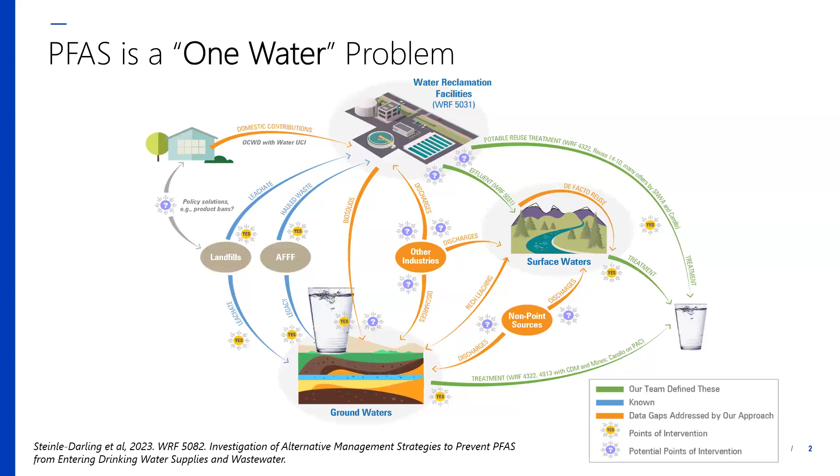Last week, EPA announced the revision to the National Primary Drinking Water Rule for PFAS. One thing I want to highlight is even though fewer PFAS are proposed to be regulated, EPA is reconsidering the MCLs and hazard index approach for PFBS, PFHxS, GenX, and PFNA. But the treatment focus is probably going to be unchanged because in New York State, PFOA is the driving PFAS in terms of treatment technology selection and performance.

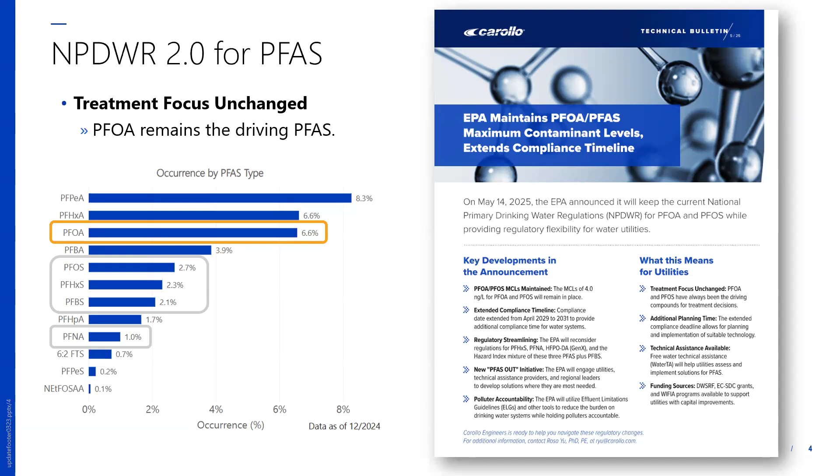New York State Department of Environmental Conservation, DEC, has released draft guidance for PFAS discharges of PFOA and PFOS. That guidance level, even though it's not regulating PFAS in surface water discharges, does provide the state with some health information on PFOA and PFOS.

The state may take additional actions or efforts to regulate PFOA and PFOS if deemed necessary to protect surface water sources. The human health guidance level for PFOA was 6.7 nanograms per liter, whereas PFOS is 2.7 nanograms per liter. Those are relatively low guidance levels when it comes to health impacts, and especially for PFOS, it's even lower than the drinking water MCL for PFOS.

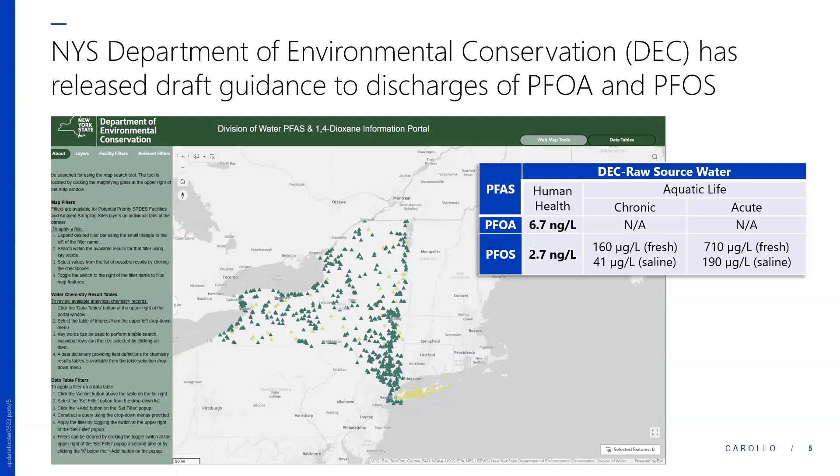When it comes to PFAS treatment, you've probably all heard of the best treatment technologies, including GAC, ion exchange, novel adsorbents, or high pressure membranes like nanofiltration or reverse osmosis, or more novel processes like foam fractionation. The nature of all those treatment processes is they don't destroy PFAS, they only concentrate PFAS.

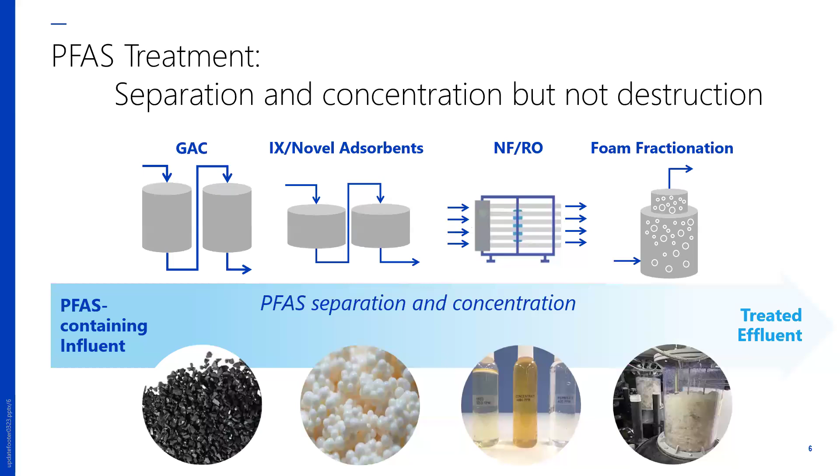It's either using the process as a standalone, such as GAC or ion exchange, or a combination, such as nanofiltration or reverse osmosis combined with foam fractionation. You will end up with a residual stream that's more concentrated in PFAS that needs to be taken care of or properly disposed of.

Increasing limitations on water and wastewater treatment residual disposal require PFAS destruction. We know, for instance, with GAC, ion exchange treatment, or novel adsorbent treatment, PFAS get concentrated on the solid media, so you generate spent media as your treatment residual. GAC can be reactivated and potentially reused, whereas ion exchange or novel adsorbents are typically sent for incineration to end the PFAS cycling.

For liquid concentrates like RO concentrate, nanofiltration concentrate, or foamate from foam fractionation residual, if the community is on the coastal lines, ocean discharge can be an option. But here in New York State, that's typically not an option. Deep well injection, sanitary sewer disposal, and surface water discharge are typical liquid concentrate disposal approaches.

But the looming issue is, if the utilities or owners cannot easily discharge the RO concentrate or the foam, then how do we address PFAS?

In terms of wastewater treatment residuals, biosolids, everybody knows there's a lot of attention around the health impact and risk assessment when it comes to PFAS in biosolids. Typically, biosolids can be land applied and reclaimed. Surface disposal, incineration, and landfilling are also alternative approaches.

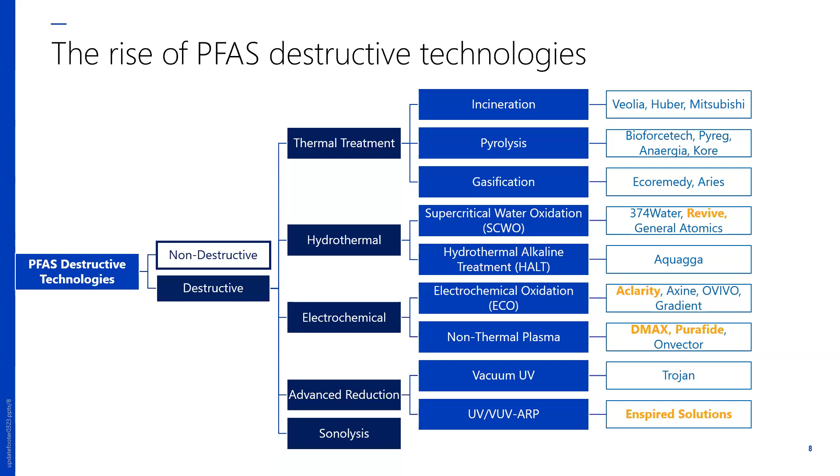So why is PFAS destruction a challenge? Because the carbon-fluorine bond is one of the most energy intensive bonds when it comes to organic chemistry. To break the carbon-fluorine bond, it takes about 485 kilojoules per mole of energy. That's the reason why it's very energy intensive.

As a reference, typical hydroxyl radical, which we consider as advanced oxidation processes, provides 270 kilojoules per mole. That's still not enough energy to break the carbon-fluorine bond. Sulfate radical, which can be generated using a UV-based or plasma-based process - those energies are still not sufficient to break the carbon-fluorine bond. That's the reason why PFAS destruction is energy intensive and can be challenging.

So most destructive technologies therefore require intense energy. There are innovations and breakthroughs when it comes to technology development to lower the energy cost for PFAS destruction, which we will hear about, and also long reaction time, because you need to supply sufficient energy for the carbon-fluorine bond to break.

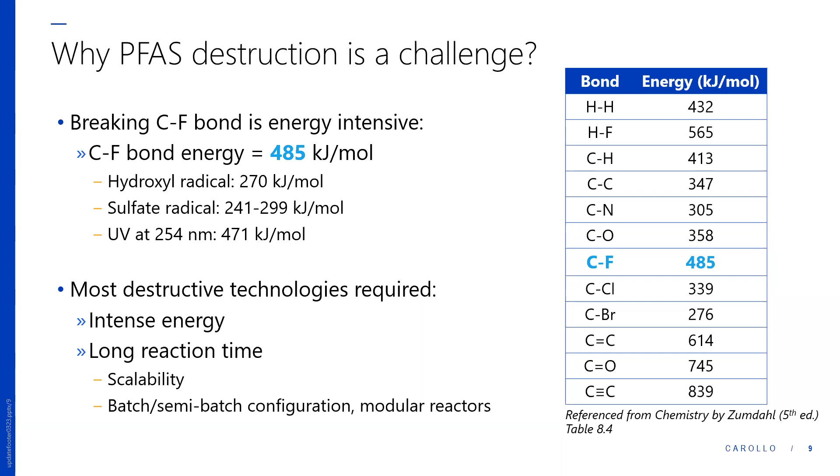So why does reaction time matter? Because it relates to scalability from an engineering perspective, and it also determines the configuration. If a long reaction time or exposure time is required, then we are discussing the differences between batch treatment, semi-batch treatment, or continuous flow treatment.

So when it comes to destructive technology evaluation, hopefully these are the four matrices or four sections of criteria that we consider. First, starting with matrix - what does each technology treat? It can go from liquid concentrate to solid concentrate.

From landfill leachate, industrial effluent, AFFF, or concentrate, foamate, to more solid waste such as sewage sludge or spent adsorbents.

As I mentioned earlier, scalability is definitely a consideration, especially for large scale applications. Hopefully we will learn from all the technology providers in terms of their current capacity and their integration with additional concentration processes such as RO or foam fractionation or novel adsorbents, to increase the PFAS concentration in the waste stream.

Flow capacity, as I mentioned earlier, is it batch treatment, semi-batch treatment, or continuous flow treatment? Modularity - as I mentioned, reaction time is a critical consideration when it comes to PFAS destruction. Can you increase the system capacity or throughput by providing multiple modular systems and system configurations?

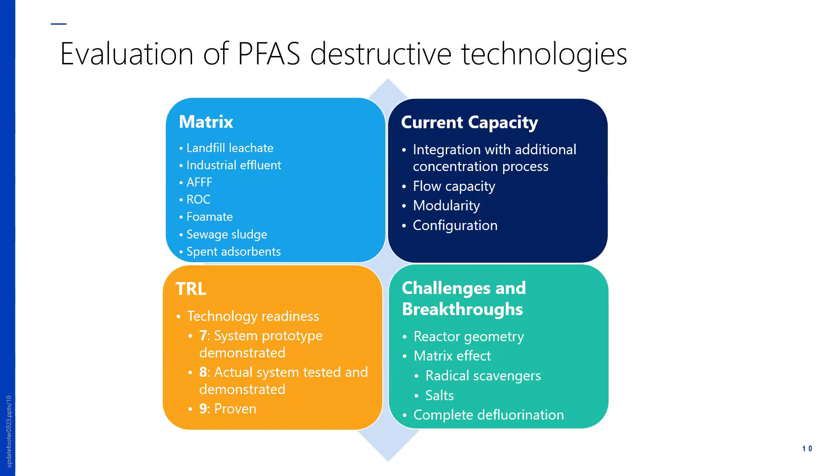In this presentation, I think I'll answer some of the questions that Rosa raised in her four-quadrant diagram that was just shown there.

Just a quick one-slide overview of Aclarity. We were formed out of UMass Amherst back in 2017. We're a small team, 15 or so of us, based in Southeast Massachusetts, and have really been 95% focused on PFAS remediation since about 2020. The company was originally formed to deal with various kinds of recalcitrant COD, tough-to-break-down organics in wastewater.

So TRL level, we see ourselves at TRL level 8 or 9. We've put multiple pilot versions of our full-scale technology out into the field, and we'll show you a full-scale system we've developed and deployed this past year. Basically, we're a startup running off seed money and Series A money to pay the bills and help us develop into a solution provider in this industry space.

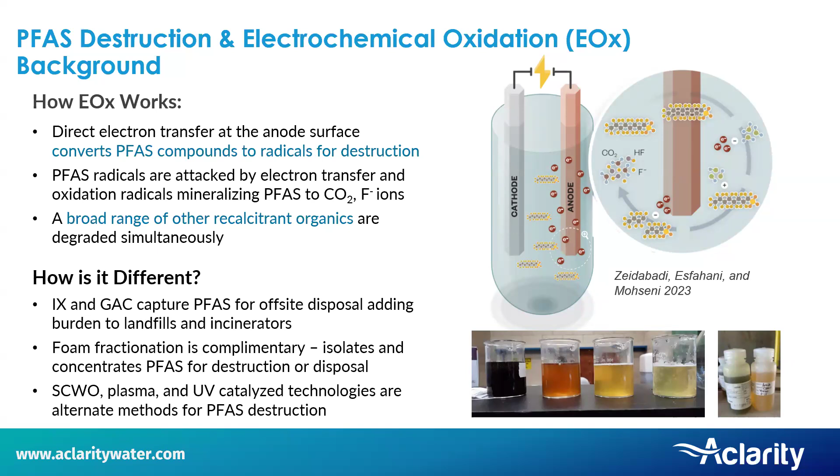That system, if we're doing a low concentration stream, we can do about 30,000 gallons a day. For very concentrated streams that we want to run in batch mode, we can run maybe 8 or 12 hours on 250 gallons at maybe 5 million or 10 million nanograms of total PFAS.

It's perfect size for treating, let's say, landfill leachate from a 50,000 gallon a day landfill producing that much leachate, running through foam frac, concentrating the leachate by about 500 or 1,000 times, and we're getting between 50 and 100 gallons total per day of leachate to be treated. We'll run that through our systems very well.

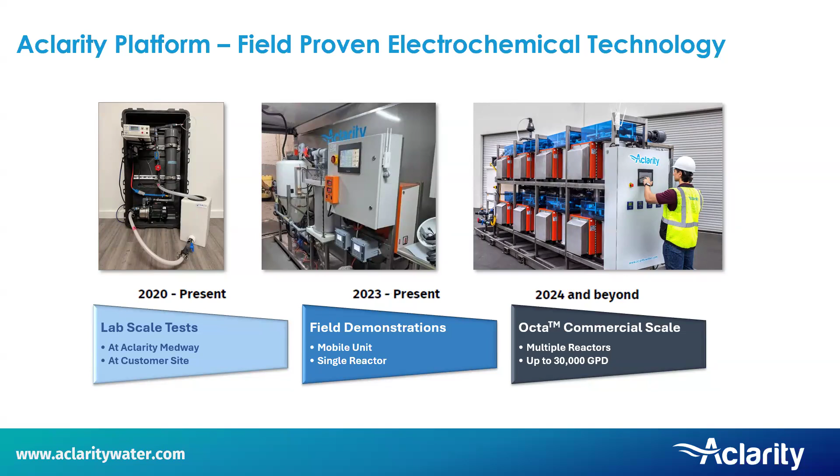Okay, so it wouldn't be right if we didn't show some kind of destruction data. So this is what we call an industrial effluent. It is PFAS that is in chrome plating rinse water. The chrome-based electroplaters or anodizers are using a mist suppressant to keep the hexavalent chrome mist from floating around in their plating operations, floating around the building and causing problems with operators at those sites. This mist suppressant contains, guess what, PFAS.

And it ends up in the rinse water at the end of the process. It ends up in the baths, but the baths don't get replaced really at all. They just make them up with chemical over time if they need to, but that rinse water is a problem. What we can do is go upstream of the general waste leaving a metals finishing facility, go to the part of the facility that's running these mist suppressants and treat that rinse water directly.

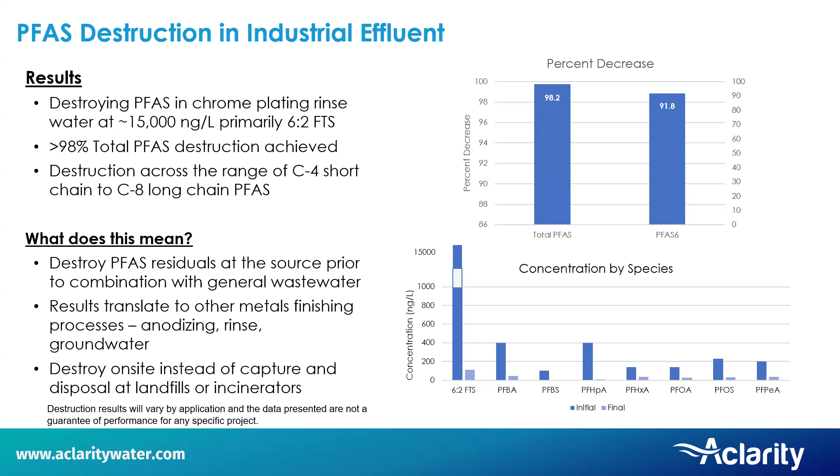So in a case like this, we would run this process probably for a little longer time to get slightly better 6:2 FTS destruction, and then the discharge would probably go through an ion exchange media or a GAC or something afterwards. But this gives you an indication of the types and levels of destruction we're doing.

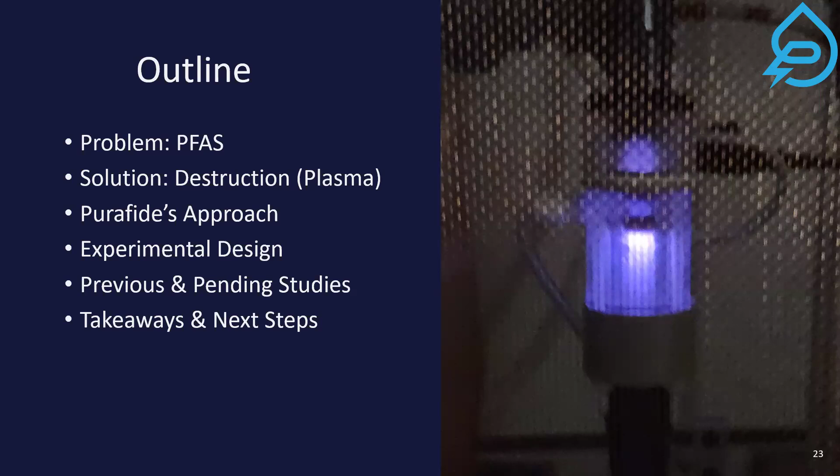Thank you. So since we have another plasma technology here, I'll go a little bit into how plasma works in general, and then we'll talk specifically about what we think makes Purafide special. I'll touch on where we think plasma could fit into existing treatment trains. Everybody knows the problem, so we'll touch on the solution briefly, specifically our approach, and then some of the experiments and data, and then where we think our next work looks to go.

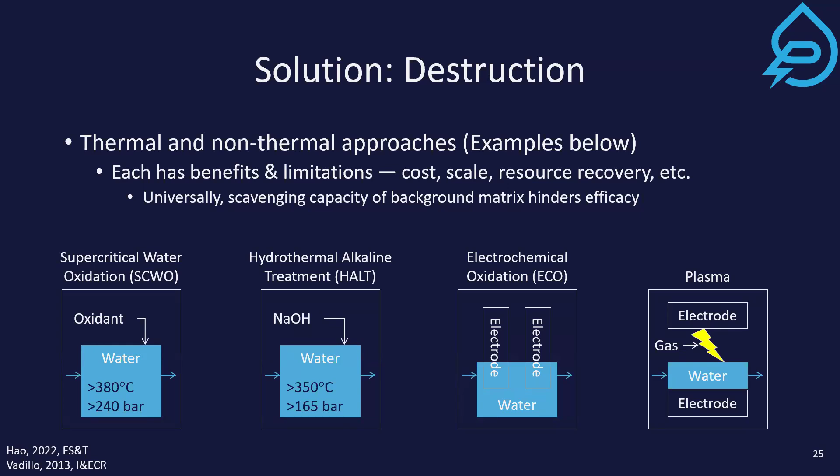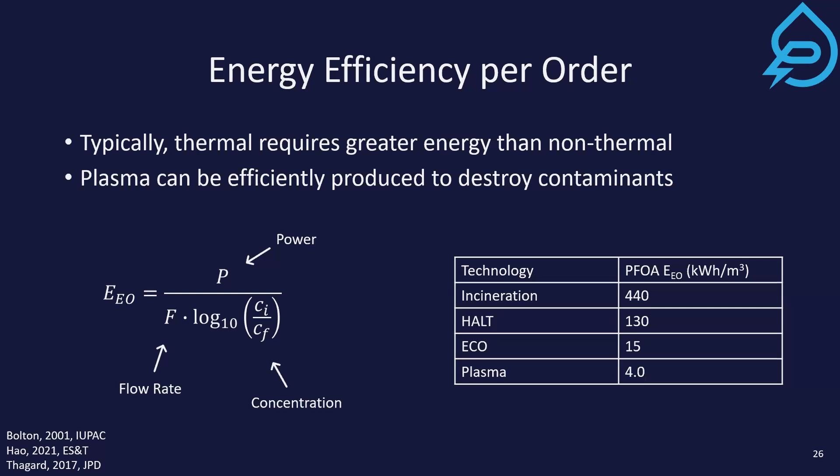So we like to use a metric known as energy efficiency per order, which is a measure of how much energy you need to clean a certain volume of water at 90% removal for a given compound. In this case, I've collected a few data points specifically for PFOA from different treatment technologies. As you can see, incineration is very energy intensive. HALT is less energy but still on the higher side. And then electrochemical oxidation - but the reason we like plasma is that it can be extremely energy efficient.

So what exactly is plasma? A lot of people don't realize that ozone and UV technologies are plasma-based technologies - you are making a radical that ultimately you're using to destroy things. In the case of UV, you're making plasma inside of your bulb, and then shooting it out, and only the UV is escaping. Now there are new technologies like LED, but I won't get into that.

However, ozone and UV do not take advantage of the short-lived radicals. What's nice is that when you make direct contact of plasma with water, you get enhanced reduction and oxidation that takes place. So how exactly does it work?

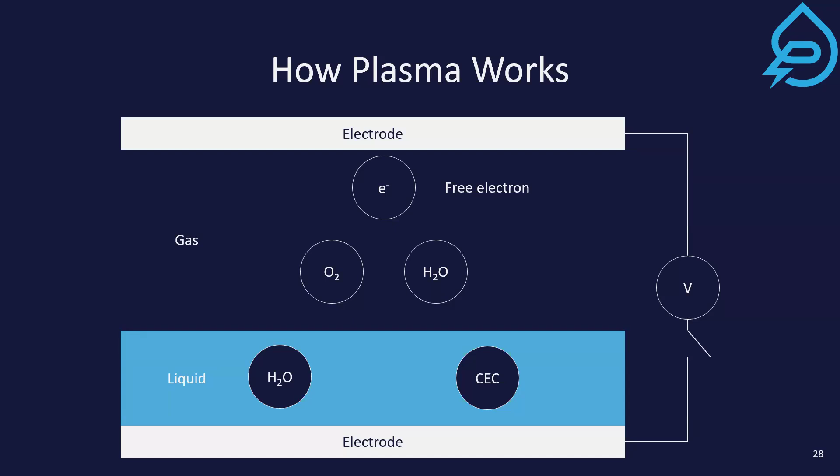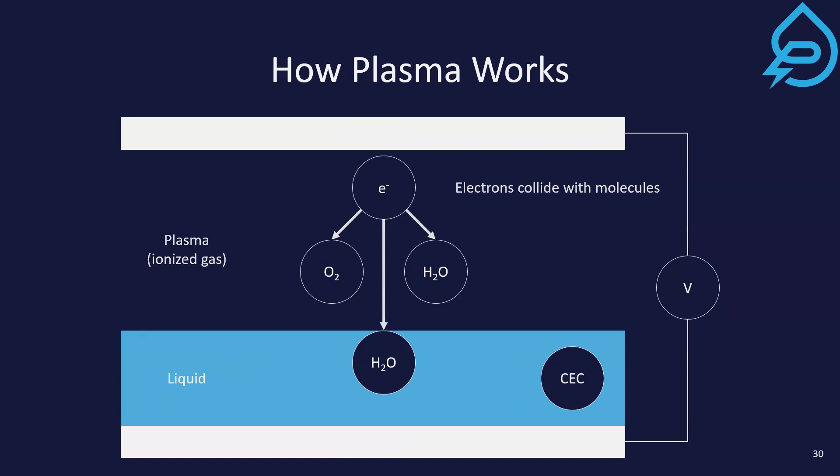I'm just showing you a few molecules here. In the bottom right is your contaminant of emerging concern that sits in some water, and then you have some gas - I'm showing oxygen and water, but you could have nitrogen, argon, all these different things. In air, there's always this free electron hanging out. So when you apply voltage, this electron will accelerate across the gap, and this electric field carries your electron, but hopefully you pump in enough energy into the system that as this electron collides with these molecules, it'll ultimately create radicals. Your oxygen will break up into atomic oxygen, singlet oxygen, superoxide, all these other things. And you also make UV in the process as well.

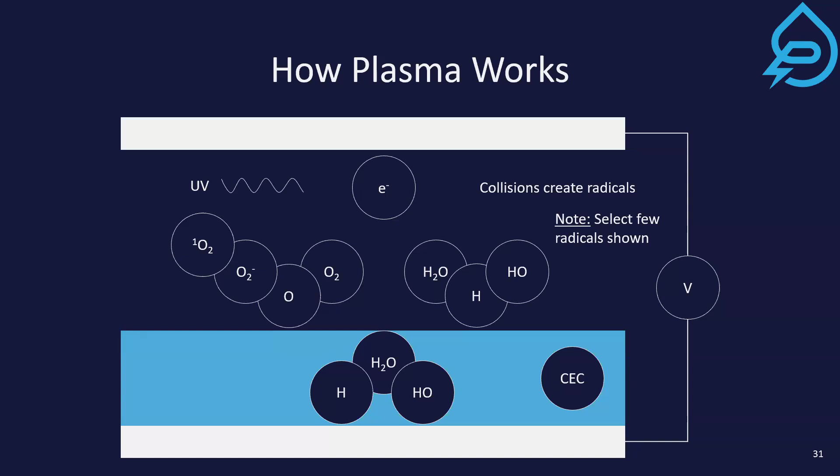So this happens both in the air and in the liquid. As it continues, these radicals will react with one another, and ultimately they will continue to react and diffuse into the water. So the way I like to view this is just a cascade, an avalanche.

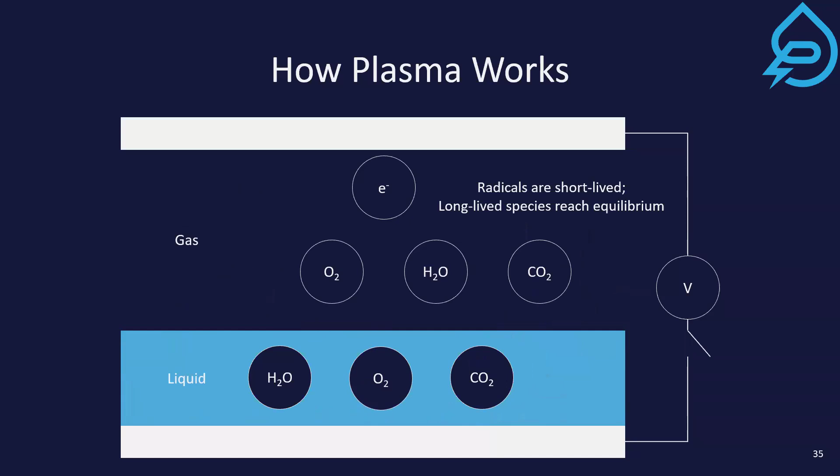As a physicist, I view all chemistry in terms of just electrons. If you can manipulate the electron to give you the energies that you want, you can ultimately induce whatever reaction you want. As these things continue to react and diffuse, they'll cascade and ultimately find your emerging contaminant until, assuming you hit it enough times, it should turn into carbon dioxide and water and any inorganic salts. In the case of PFAS, it should be fluoride. And once you turn off the plasma, you'll just be left with the longer-lived species.

So what makes us special? A lot of people will tell you they think they know what's happening in the water. Most of us don't. We like to treat it like a black box, and we'll destroy things and measure things outside or after treatment and try to induce what's happening here.

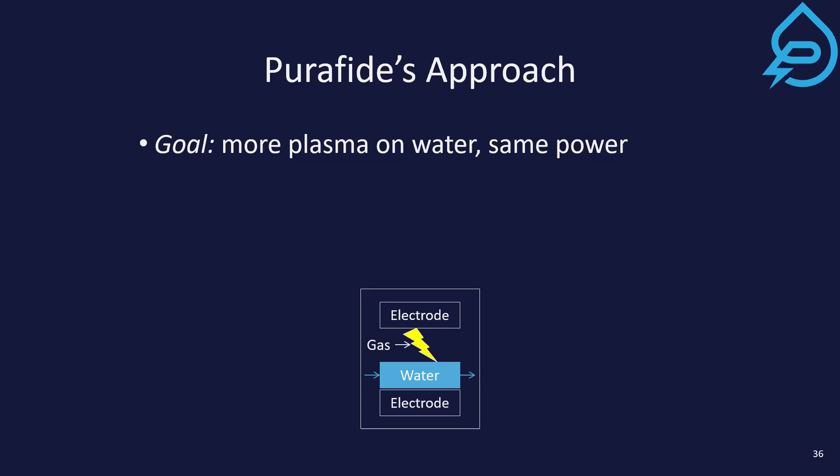But really what happens is that when you see plasma, when you see lightning in air, it's very filamentary, very small, with a very small contact area. So the name of the game is how can I increase this contact area? How do we get more plasma on water using the same amount of power?

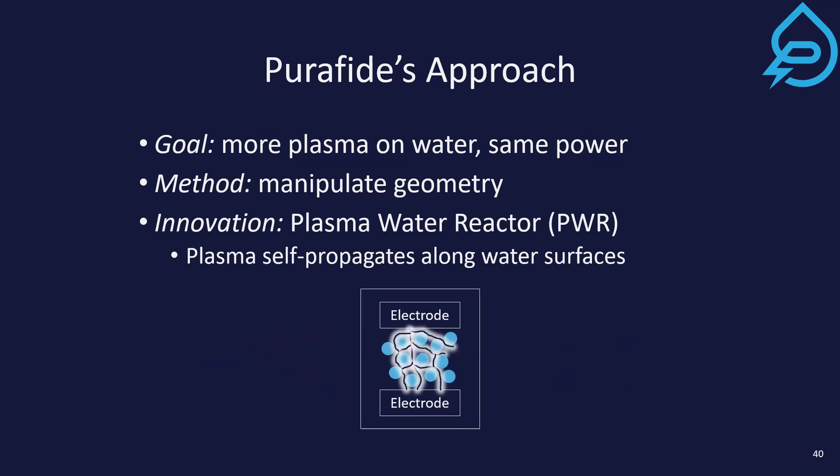In our case, we like to manipulate the geometry. That ultimately gave birth to what we call the plasma water reactor, or PWR, which is an homage to my nuclear engineering background. The name of the game is how do I get the plasma to interact with more water? Here I just have some water droplets, and if these are closely spaced enough, as I pump more and more energy into this thing, the plasma will continue to propagate across all these different surfaces until you finally have something that looks like this.

What we do is, everybody's water is unique. So we have to take your matrix, then modify the operating conditions and vary all of these different flow and geometry settings to ultimately determine how to optimally treat your water.

Everybody will come to you and say, hey, I want this cleaned as quickly as possible, I don't care how much energy it takes. That's one end of the spectrum. Or on the other end, okay, I have this vat of concentrate that doesn't really need to go anywhere, but I ultimately need to get rid of it—use the least amount of money, aka energy, to destroy it. So that's on the other end of the spectrum.

So we like to play around with these operating conditions to kind of map this out and determine what these costs look like. We'll operate first in batch mode, sample at various treatment times, and then monitor the plasma and the water quality in real time. We've developed in-house analytical methods for PFAS and other emerging contaminants.

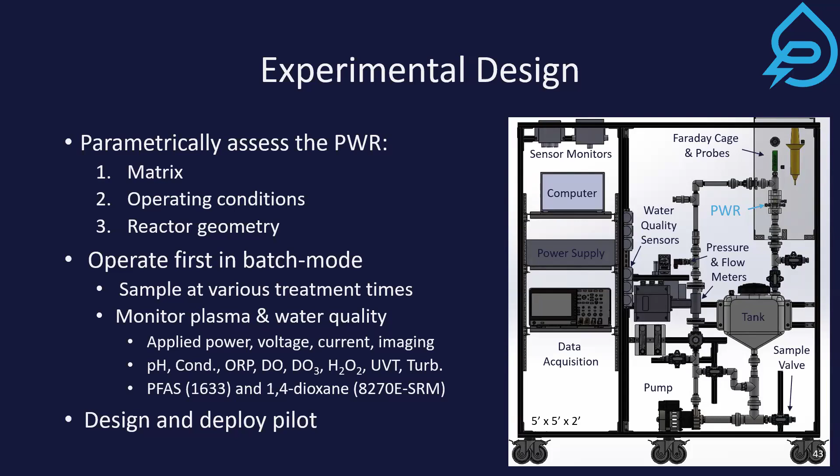We used to do our work mostly on 1,4-dioxane and then transitioned to PFAS. We would ultimately design and deploy the pilot. We're at probably a technology readiness level of 6. We're in the process of deploying our first few pilots, and we've worked with different state agencies, engineering consultancies, and environmental organizations.

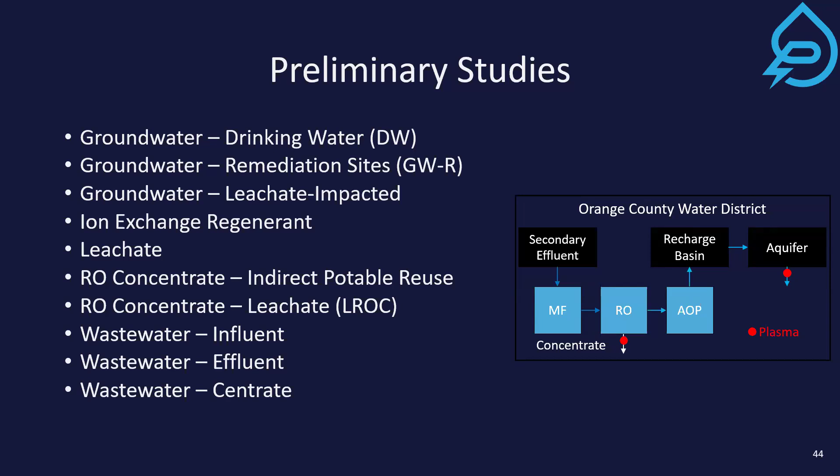We've tried a wide range of matrices—everything from drinking water all the way up to RO concentrate of landfill leachate and everything in between. One of the hardest things for us is actually that the plasma works in all of these matrices, so the hard part is figuring out which one we should target first and deploy our pilots in.

So I have some data here. We don't need to really go into it too much—I'd be happy to discuss this on the side, but this is just to show you some of these matrices. We were given some matrices where electrochemical oxidation was ineffective, specifically this remediation site in groundwater and the RO concentrate of landfill leachate.

And this was a few years ago, so I know Aclarity has moved past that, but we've kind of looked for matrices that other technologies struggle in, right? And so what we find is that the plasma will work effectively and very energy efficiently.

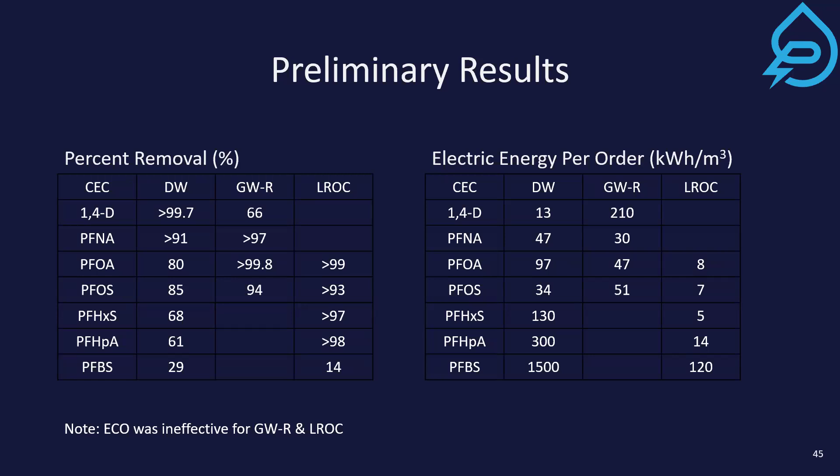One big takeaway here is, if you look on the right-hand side, you would think that higher concentration water is more energy efficient to clean, but what we find is that sometimes that's not always the case. So in the case of drinking water, you could see some of these energy efficiencies per order are roughly in a similar range of energies used. It goes to show that you really need to try it for each matrix before you can say one isn't effective. But that said, you want to focus on higher concentration streams because those are typically lower flow rates.

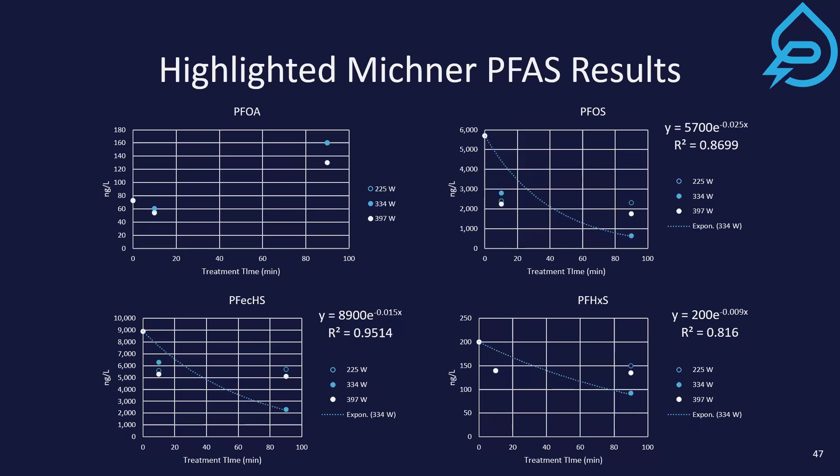Last but not least, what we realized, and this data is several years old, when we first were just trying to figure out what's happening, we'll see that some of these concentrations actually increase. What's very important here is that you do need to determine what the precursors are, or how you're transforming some of these molecules into other things. As Rosa mentioned, PFOA is the main compound that we use as our criteria, so I want to make sure I see this peak increase and then ultimately decrease away, which we've seen before. The main thing is that longer chains are easier to destroy than short chains, and optimization is critical. Those electrical energies per order could vary by significant orders of magnitude.

Another thing, just to hit the nail on the head, is that the most cost-effective matrix is not always what you think it is. Similarly with that RO concentrate, we found that the drinking water from Orange County, for example, had similar EEOs. In that example I showed you there, that was a different drinking water.

Another major thing to take away is that the kinetics can unexpectedly exhibit non-first order decay. That's when we know that definitely precursors and scavengers play a role in your destruction. So what we're trying to really do is figure out, is there a way to real-time measure species and water quality that ultimately serve as surrogates? So instead of always measuring for PFAS and using those expensive analytical tools, even though we've developed those in-house for fast turnaround times, can we ultimately say, hey, I found this surrogate that I can measure on the side and show that it has sufficient destruction?

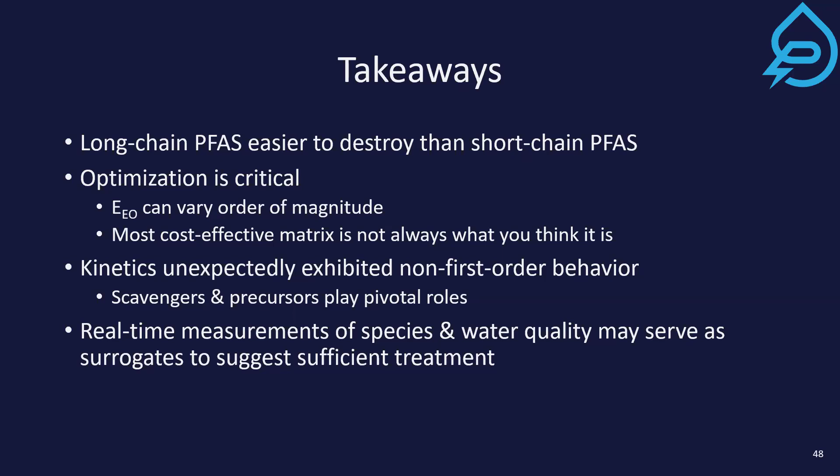This is something similarly we're modeling with, for example, in California, they do indirect potable reuse. They'll use 1,4-dioxane as their contaminant of concern that they use as an indicator. And they'll use things like pH and total organic carbon to indicate, okay, this is how many scavengers I have in the water and how much I should compensate for the destruction. So then I don't have to always directly measure for the PFAS.

So we have several pending studies. We're looking at bench scale, surface water, wastewater, you name it. And then we're deploying these pilot studies in industry-impacted groundwater and leachate.

Some of the applications we're looking at is figuring out the synergy in these advanced treatment trains. What we're finding is that you can enhance electrocoagulation, biodegradation, inactivation, and potentially replace some of the treatment technologies that are already in your treatment train. So it would be nice to figure out how we can simplify these processes and then ultimately real-time monitor and dynamically treat the water. And that's the nice thing about plasma.

We can vary these operating conditions real time. So if you have an upstream event that takes place, like a spill, then we can real-time adapt to it if you see some changes in TOC, for example, and say, hey, let me crank up the juice to compensate.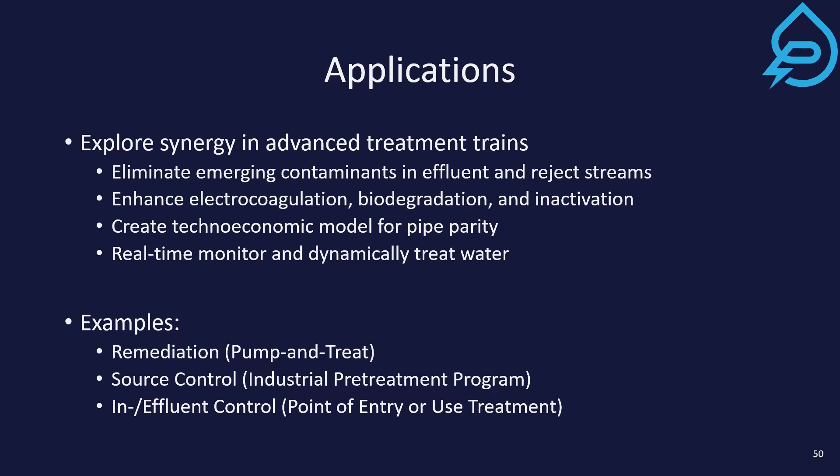I'm going to show you a few treatment trains where we think we can apply this. In GAC-based treatment trains, you can replace the UV for treating spent media. In GAC, the shorter chain PFAS make it through, so that's something plasma can be used to destroy, or other trace organics like 1,4-dioxane, and also get inactivation credits.

Similarly, you can use it to treat the spent media. We've developed not just a liquid plasma water reactor, but also a plasma solids reactor, looking to regenerate activated carbon in real time, or using some type of solvent to rinse it off and then destroy that solvent.

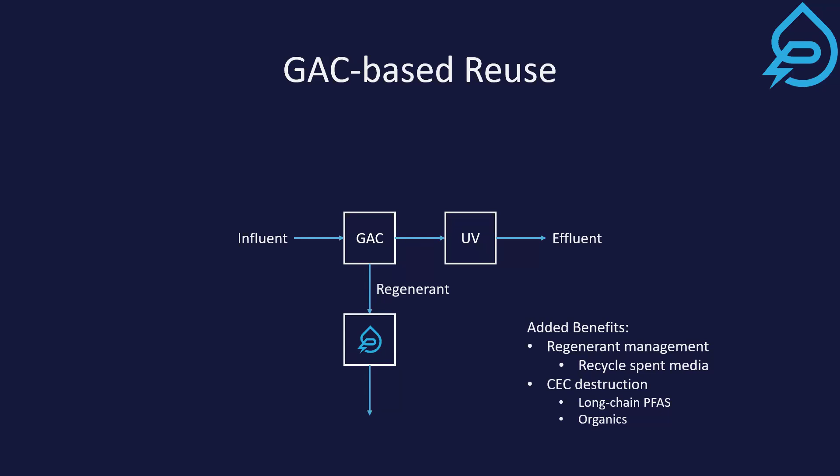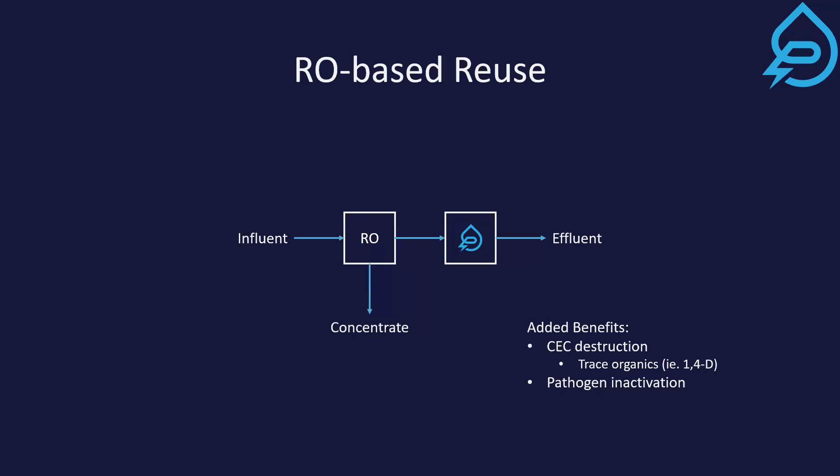Similarly, in the RO-based treatment train, you have advanced oxidation on the back end. Plasma technologies already exist there, but if you're directly injecting plasma, you should get enhanced destruction. If we replace that, we should be able to get additional credits, or address the concentrate stream as others have mentioned.

In summary, what we found is that plasma can operate regardless of the background matrix to achieve whatever metrics you're looking for. We believe some of the best applications include decentralized water treatment, where you're off the grid. Our pilot unit we're trying to hook up to solar panels so it can be fully off the grid. For example, this landfill is in the middle of nowhere and struggles to get power and sometimes loses it, so we're trying to create remote and resilient units that can operate on their own.

Ultimately, we're putting our analytical tools in the trailer as well so we can bring it there and analyze these things on site. At the end of the day, what we believe at Purified is that ultimately we can online monitor these things and real-time treat them.

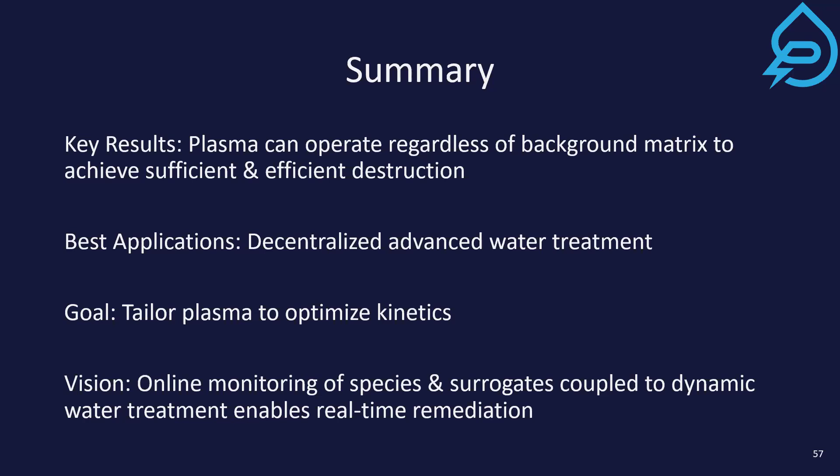One thing I wanted to touch on is that really what we're focused on is addressing sustainability and focusing on environmental justice. For example, with our analytical capabilities, we're trying to team up with marginalized communities to provide them with free analysis.

Historically, tribal nations are located - I don't want to misstate the exact numbers, but a majority of them are within about a 10 or 15-mile radius of a Department of Defense site, which is notoriously known for PFAS pollution. So if we can help them identify sources and ultimately destroy them, that's a win-win for everybody. We want to break the contamination cycle, and this is the model we use to determine who we should be able to help out.

We want to be able to deploy more pilots and partner with those in need. So if you want to team up on a project, let me know. Thanks.

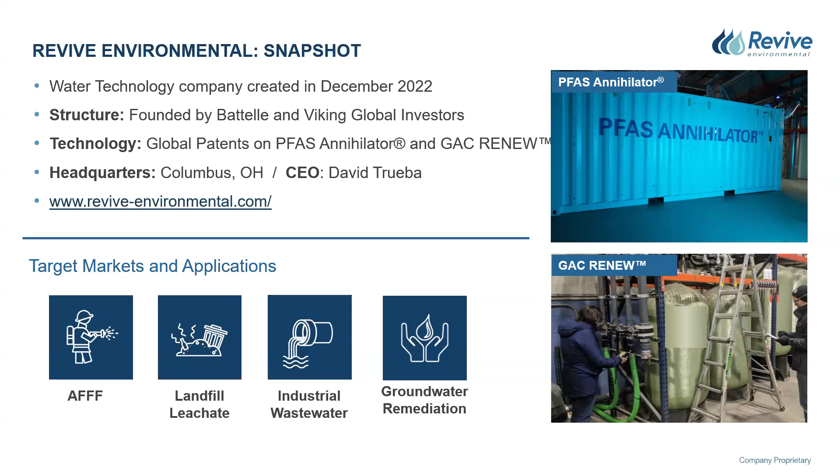Rosa had brought up the EPA compounds referenced last week, and made some commentary about updated drinking water requirements. At the time I built this slide, this is what the MCLs look like. They have since changed or potentially will change, and we could see even more changes. So one thing to highlight is PFAS is an ever-evolving landscape. We used to call these compounds PFCs years ago, now they're called PFAS. The MCLs have been adjusted and changed, timelines have changed. So the scope in which PFAS needs to be treated is constantly changing.

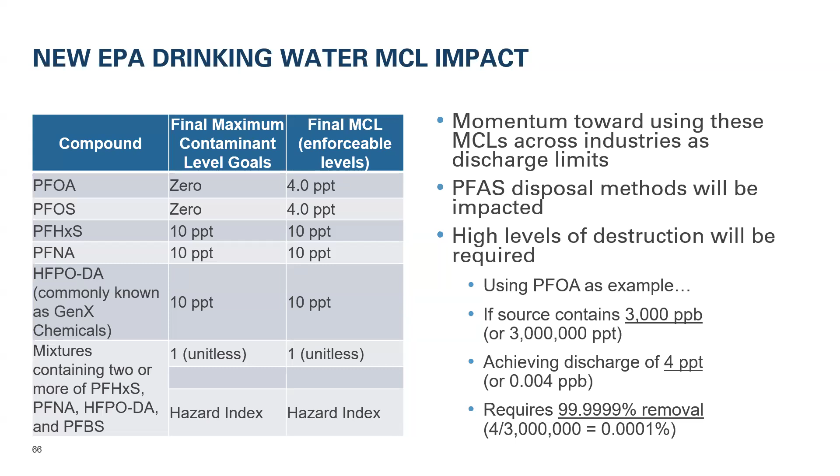So it requires a flexible treatment technology that's also going to provide a permanent and complete destruction loop, so there's not potential rub with upcoming changes in regulation or requirements for what that treatment train might have originally been designed for. Other thing to note is whenever we refer to destruction today, this is what we're using as our anchoring point. So whenever we define destruction at Revive, we're using this drinking water standard as that guiding principle. So if we say we destroyed a material, we're talking about destroying whatever that base material was down to the standards you see there on the screen.

Quick summary of SCWO and what it is. So supercritical water oxidation, or SCWO as we'll shorten it to, is essentially a high temperature and pressure process in the presence of excess oxygen. So what we're doing is taking in liquid material, emphasis on liquid - we do not do solid material, we're a liquid focused company. We'll take liquid material into the reactor system, elevate the temperature up to 500, 600 degrees Celsius, pressure up to 3,400 PSI, and then apply an oxidant. In our case, we're using hydrogen peroxide. Under those conditions, that breaks the carbon-fluorine bond mentioned by Rosa earlier this morning and mineralizes that PFAS out.

And on the back end, you get three primary components. You're going to get a majority of clean water, again defined as meeting that drinking water standard. You're going to get a salt brine, non-hazardous, non-PFAS containing liquid industrial byproduct, and a small amount of emissions as well.

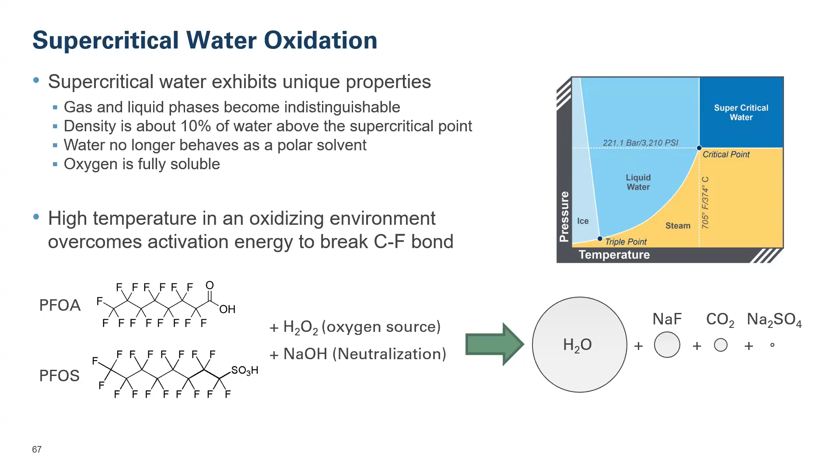What do these systems actually look like? So we have 7 of these systems fleet-wide, at our facility in Columbus, Ohio we've got 3 of these systems put together under one roof. A couple things you'll notice: number one, these are 20-foot shipping container systems. So while these are situated at a fixed destruction facility, they can be taken for an on-site deployment, a pilot, or some kind of demonstration project where we might not be able to do destruction at our facility and need to go meet the customer, meet that demand there on site.

The other advantage of this process is it allows us operational flexibility to push and pull that production capacity as we need it. So we've got another facility in Grand Rapids, Michigan, where we do destruction as well. And depending on market need or project need, we can mix and match these annihilator systems to support these projects. These systems are all identical in design and operate the same way, but the way we've tweaked and engineered them over the years gives us the ability to process different materials differently.

EPA put out a guidance document last year commenting on PFAS disposal methods. While they didn't necessarily give specific commentary on any of the technologies you're going to hear today, what they did do is loop us all into a big bucket and said, if you want to consider a PFAS destruction technology, here's what you should be looking for. There are six criteria. We're not going to go through all of them for the sake of time, but I'll call out a couple that are important to Revive and how we're a little bit different than some others.

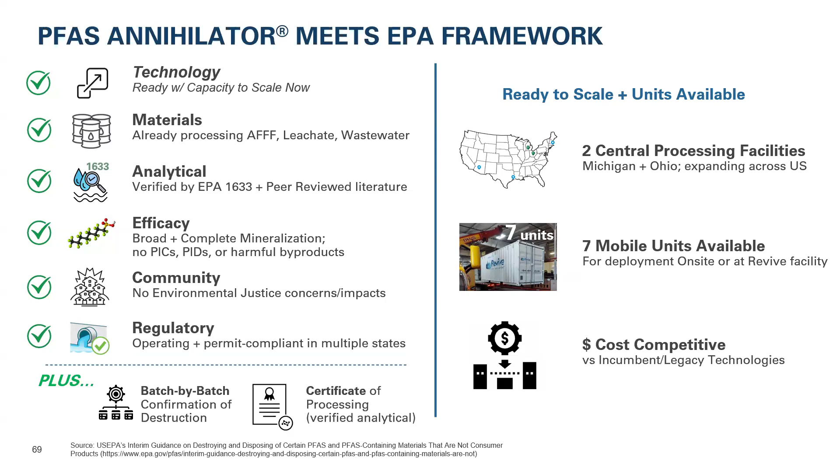Let's look at some data and case studies here. We'll talk about AFFF first, then transition into some of those more dilute streams, including material we pulled from projects like the AFFF state take-back programs we've executed recently.

This particular material at the top, if you notice, has a couple of letters here. It stands for AR, alcohol-resistant AFFF. Essentially, that means it's a highly durable material, tenacious and tough to destroy. What we've done here is destroy this material through one pass in the Annihilator system. You get the data that you see in front of you.

The important thing to know is this is representative of data that would be pre-polishing. We are not doing polishing on PFAS specifically. We do have on the back end of our systems a filtration system to help meet some of those discharge specs, but it is not doing the heavy lifting in terms of PFAS treatment. So this data is representative of destruction data before it would enter any kind of filter.

A couple things you'll notice: number one, we've highlighted those EPA drinking water standards, which are now already a little bit dated. You'll see some of those long chain compounds, PFOA and PFOS, being taken from a couple thousand parts per trillion down to 1 part per trillion or below. Some of those smaller, shorter chain compounds, like PFBS, in the 4,000 to 5,000 parts per trillion, being brought down below 1 part per trillion. The other compound we'll point out here is PFHxA, the 3rd one down on the list.

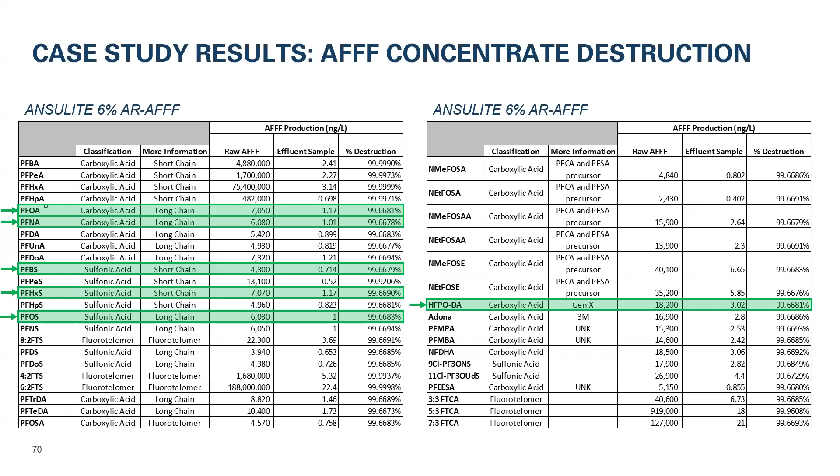Let's talk a little bit about how we view destruction with SCWO in terms of a mass balance or a TOF mass balance. So this technology in terms of POF or TOF mass balance is still developing. One thing we'll preface this with is there's still some data gaps and analytical gaps when it comes to these mass balances.

But there have been mass balances performed, and performed recently, on this process. We're going to highlight a particular case study here where a study was done on a very similar material to what we just talked about earlier, an alcohol-resistant AFFF.

The key findings: number one, they observed a significant reduction in total organic fluorine from the influent to the effluent. A very small percentage of that effluent material was observed to be organic fluorine, which would represent potentially that PFAS component. Greater than 99.9% of that effluent did not contain organic fluorine, the specific number being 26 nanograms per minute of total organic fluorine.

The other key finding is on the vapor phase, very trace amounts of total organic fluorine were observed in the study. 0.04 nanograms per minute of total organic fluorine in that phase, essentially negligible. It's hard to even measure down to that point.

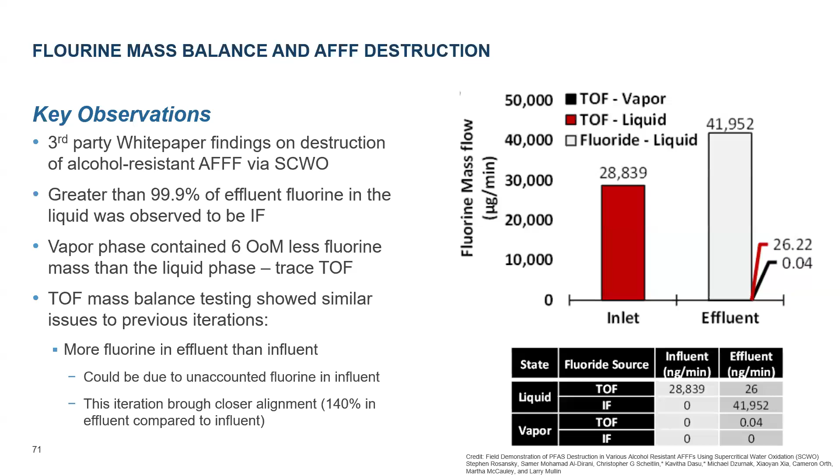However, the data gap here is that the alignment between the influent and effluent material is still not quite there. We observed 140% of the fluorine in the effluent as compared to the influent, essentially meaning we didn't measure enough fluorine on the influent side, so there was some portion missing. This is still an ongoing field of study, and we hope this analytical technology develops.

All right, we'll close out here with what we're doing with those dilute recurring streams, again landfill leachate. We'll use that as the example today, but this could also be applied to applications like affected groundwater or an industrial wastewater site.

So we have two models here at Revive. One model is a complete turnkey solution, represented by this truck you see on screen, which would haul that raw water to one of our service facilities where we'd provide both separation and destruction at our site. Or, and this is almost always the most economical approach, applying that separation technology at the customer site so you're not hauling all of that water — you just have to haul the concentrate after that process has been completed.

We're technology agnostic in terms of how we do the separation. There were some separation technologies talked about earlier in today's presentation. We're going to talk about foam fractionation here in this particular case study, but we've also worked with reverse osmosis concentrate and adsorption media concentrates, solvents that have wiped the PFAS off of that particular adsorption media.

So here's a case where we actually brought this to a site — a landfill out in the Midwest United States that needed to meet a PFAS discharge permit targeted on PFOS and PFOA. They needed to get down to 8 parts per trillion on PFOS and 20 parts per trillion on PFOA. Those are pretty tight discharge permits, because they're sending to a wastewater treatment plant that discharges to surface water, so they're being held to a tight standard.

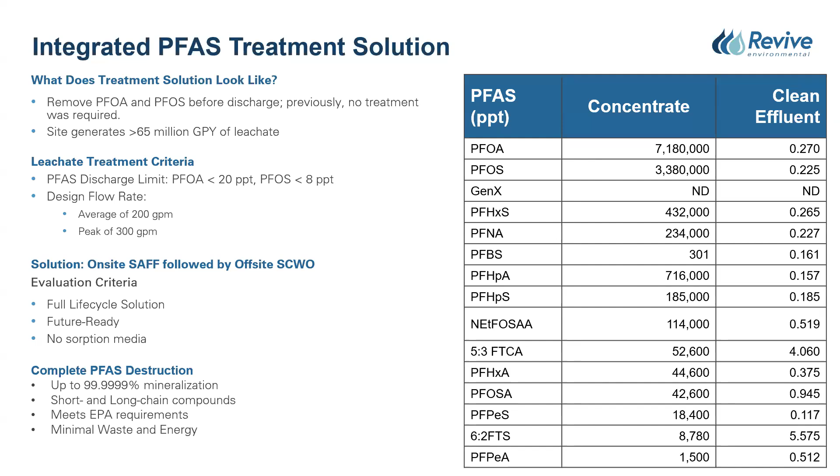But through one pass of the annihilator, we saw significant levels of reduction to PFOS. This is all in parts per trillion, so we saw less than 1 ppt in PFOS and PFOA, well below that drinking water standard, beyond an order of magnitude.

So to sum up, again, the PFAS annihilator is going to provide that strong depth and breadth of destruction on concentrated material. It's not going to generate a significant waste stream as part of that process. It's going to pair well with some of those other technologies like foam fractionation or reverse osmosis system to treat some of those maybe dilute recurring streams.

And this is a technology group that we're applying out in the market today. Thank you.

I'm going to talk with you about our UV-based destruction technology, photoactivated reductive defluorination. We are a women-owned and women-led company located in Lansing, Michigan. We opened our doors in 2021, and all we do is PFAS destruction.

We did proof of concept on hundreds of benchtop samples of this chemistry and designed and built the reactor that I'll show you how that works. We call it the PFASigator. And today we are here to talk with you about our technology.

I'm going to jump right in and talk about how our technology works. I'm really happy that this panel is all PFAS destruction, it really emphasizes the fact that these technologies stop the cycle of collecting PFAS and moving it somewhere else, where there's a risk of it being re-released into the environment.

By destroying... I feel like I'm electrocharged here. By destroying the PFAS, we're breaking that cycle. And photoactivated reductive defluorination, or PRD as we call it, is one of these destructive technologies. It breaks the cycle, transforming PFAS into non-toxic discharge.

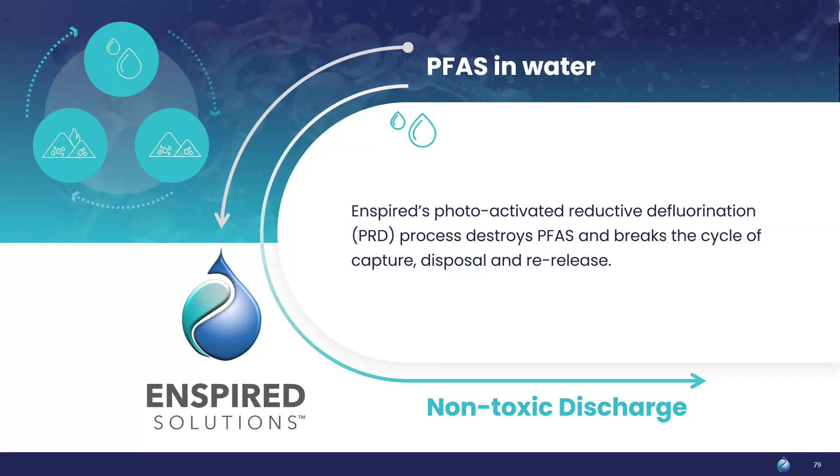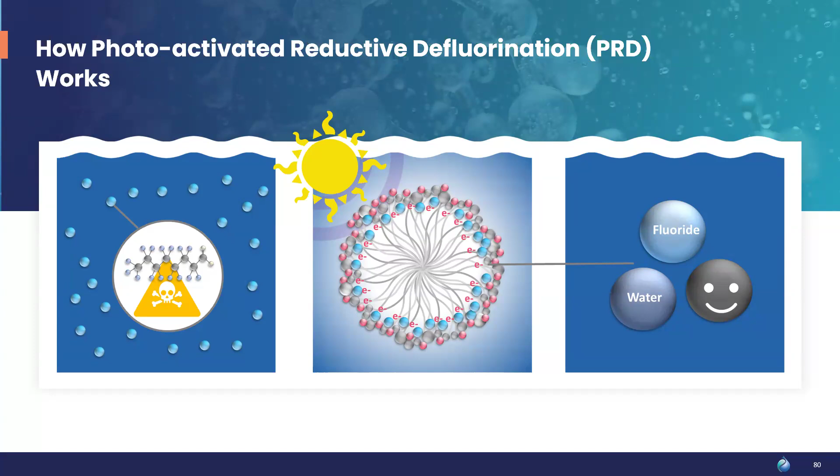This chemistry has won an award from both EPA and the Department of Defense for meeting their criteria for PFAS destruction and energy efficiency.

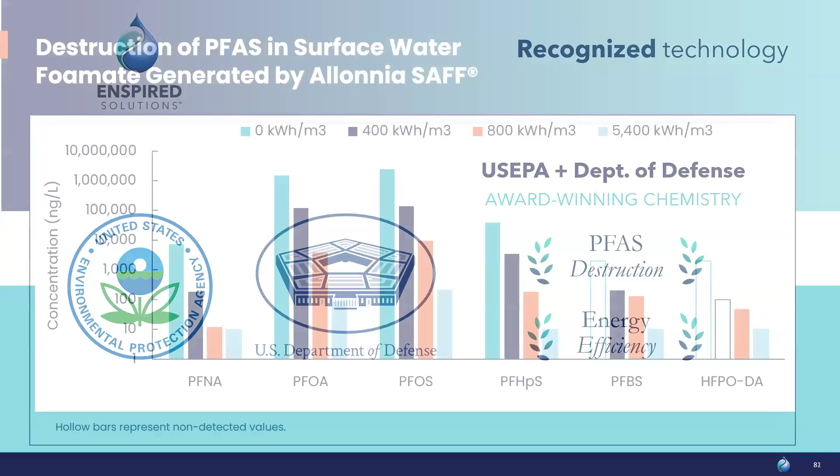This is a graph of some real-world results of our PRD destruction process. On the y-axis is total PFAS concentration in log scale, and the x-axis are the 6 federally regulated MCL PFAS. And then the different colored bars are concentration of those PFAS with different treatment doses, different UV doses, or time of treatment. So if you just look at the PFOA, PFOS clusters there, you can see initial concentrations were over 1 part per million.

And with treatment time, those concentrations decreased to tens and hundreds of PPT. At the time that we turned the UV lamp off here, you can see all of those curves for the different PFAS follow the same trend. If we left the lamp on, all of these PFAS would be non-detect.

And obviously you can see the effect of the destruction technology on these 6 PFAS, but all PFAS in solution are being affected the same way. Their concentrations are decreasing over time, and with increased UV dose, they would all become non-detect. This is a surface water sample, actually, that was concentrated by foam fractionation prior to us destroying the PFAS.

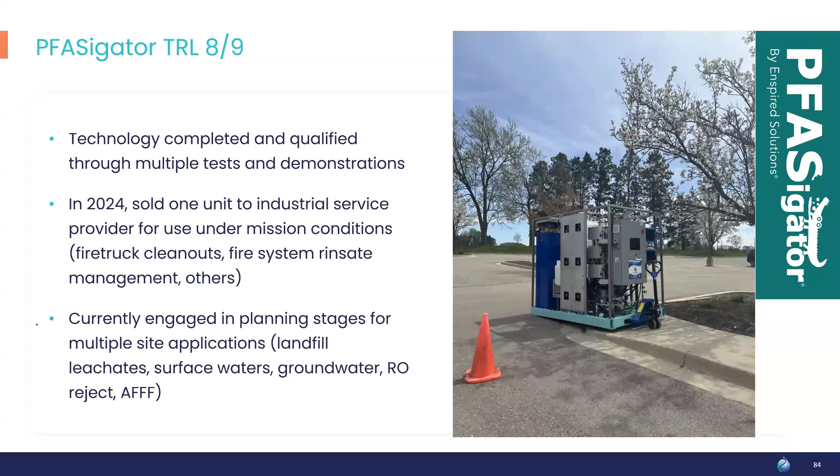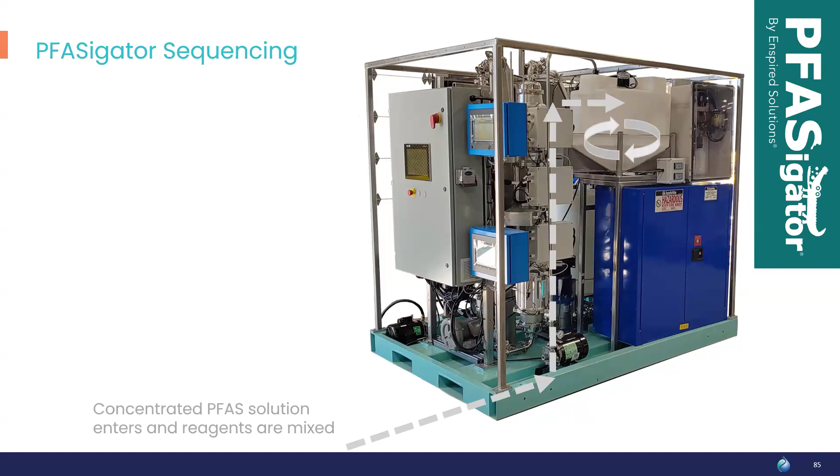Here is the PFASigator, and I'll show you the process flow here. It's an automated machine. The influent comes into the PFASigator - this would be a concentrated PFAS solution. The reagents are mixed in, and then that batch is run past the UV lamps for on the order of hours.

Wow, this is kind of auto-advancing on me here. Sorry about that.

We would determine the treatment time based on a treatability test in the lab, and we're also watching the production of the fluoride ion in the field, so we know when we're meeting the treatment targets. We can confirm that that's happening, and then the batch is automatically discharged.

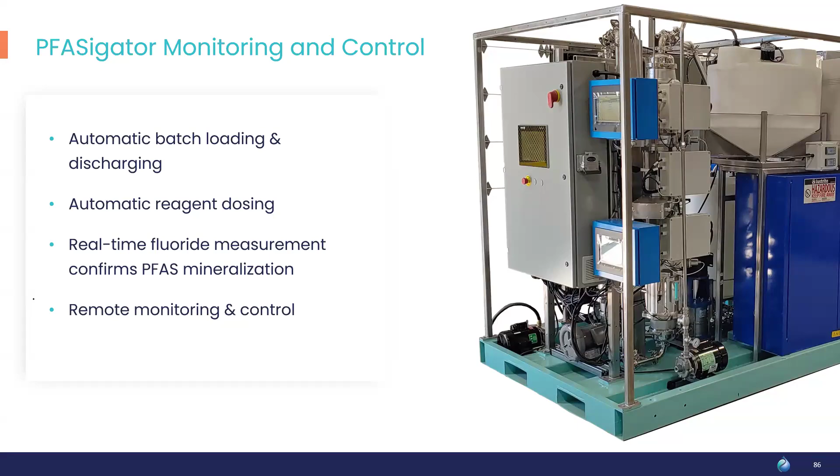So in terms of monitoring and control of the PFASigator, again, the automated influent and effluent processes, the reagents are dosed automatically. We have the real-time fluoride measurement going on with the onboard ion selective electrode. And then the whole system can be monitored remotely from a dashboard on a computer in your control center. It also sends alerts to your phone if you're looking at system updates, say level of reagents, et cetera.

So now I'm going to show you a case study where we applied the PFASigator in the field. And we've talked here about how concentration is important for the efficiency of PFAS destruction. That is true for our UV-based system also.

Our system works most efficiently if you concentrate ahead of time, because for each order of magnitude that you destroy PFAS, you're spending the same amount of energy or cost. So we like to operate the PFASigator at high concentrations, destroy 1 or 2 orders of magnitude of the PFAS, and then recirculate the remaining PFAS back for reconcentration. And I'll show you how that works.

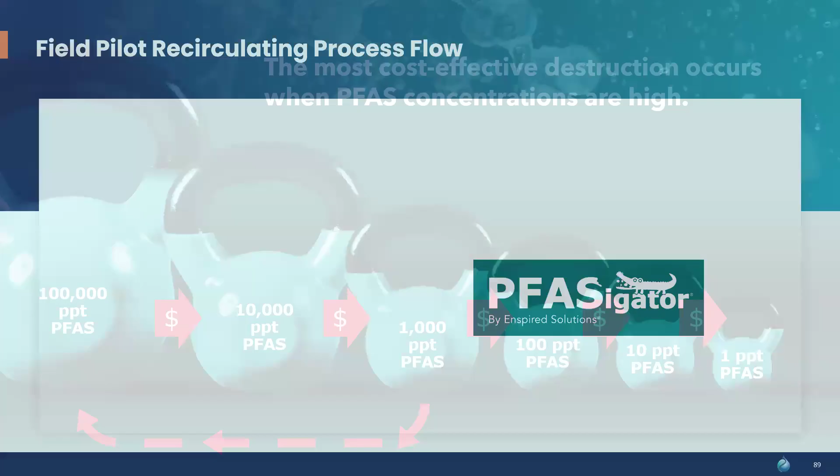We start with a contaminated groundwater source. That groundwater flows into a separation and concentration unit - let's say foam fractionation does that. The foam fractionation unit removes the PFAS and discharges the remaining water. That would be your permitted discharge. That concentrate now comes into the PFASigator, where we destroy 1 or 2 orders of magnitude of the PFAS, and the remaining PFAS is recirculated for reconcentration again. So this destruction loop continues on the waste coming out of the contaminated groundwater as it flows through the separation and concentration unit.

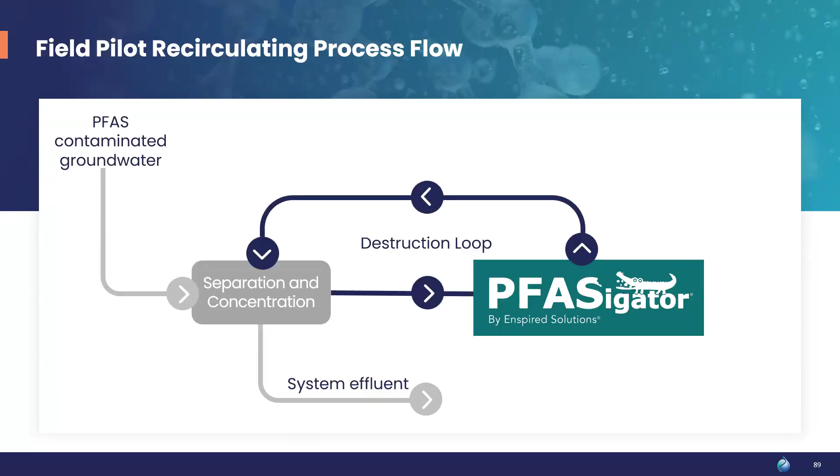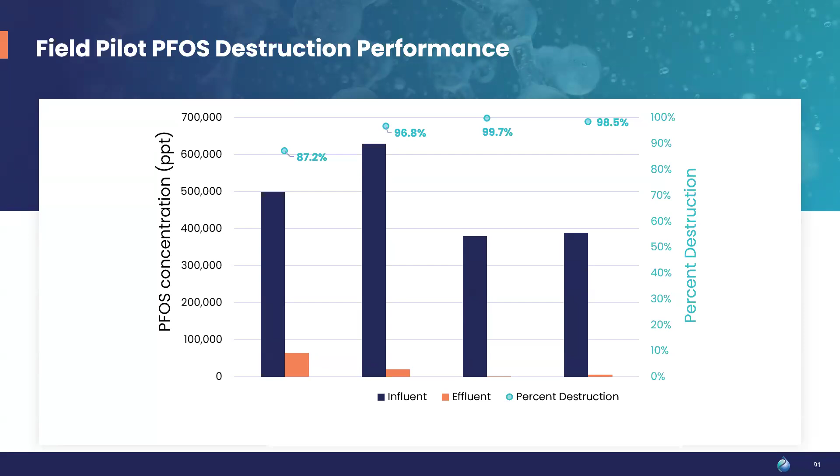Good timing on that. Here's some data from that pilot test. PFOS concentration on the y-axis, this is what they were being regulated for at that facility. Batches on the x-axis. Dark blue bar is concentration before treatment. Orange is concentration after treatment. And then the teal dots is percent destruction for each batch. So we were achieving over 99% destruction there.

This is that recirculating process flow again, showing the volumes and concentrations for that field pilot. And then I'm overlaying here the cost per gallon that we calculated for this pilot project. On the left, you see less than half a cent per gallon of system influent, that being the groundwater. And on the right, you see $3.84 per gallon of concentrate. It's one or the other - $3.84 per gallon of concentrate. That includes both the CapEx for the machine and the OpEx to operate the machine, including the energy cost.

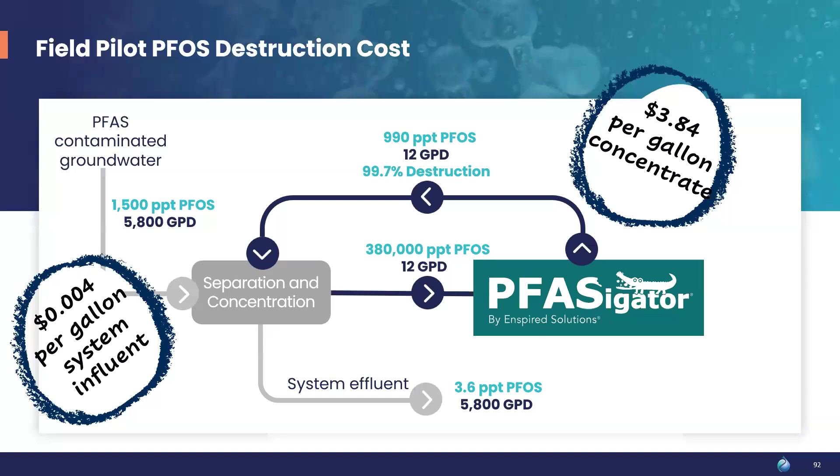Generally, we say costs per gallon of concentrate treated with the PFASigator ranges from $2 to $7 per gallon. And the difference is the matrix that the destruction is happening in. For a cleaner matrix like groundwater, the cost will be lower. For a more complex matrix like landfill leachate, the cost will likely be higher.

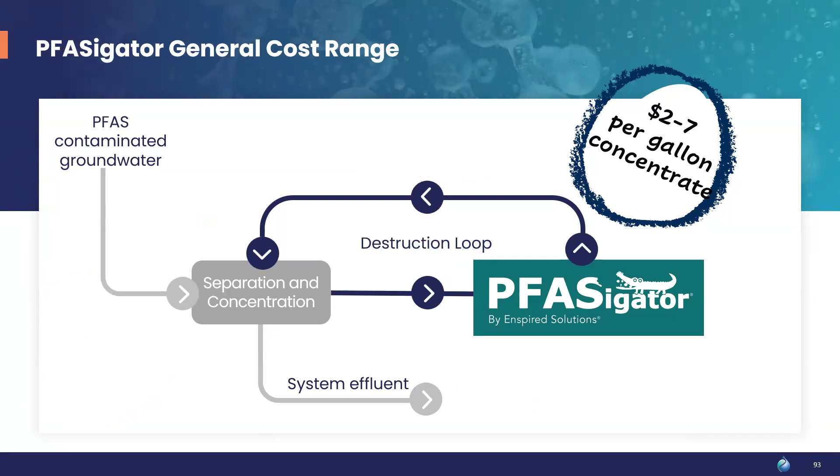For very high flow situations like municipal water and wastewater, we have been working with regenerable media that can handle million gallons a day plus filtration to remove the PFAS. That media sorbent can be regenerated, the PFAS is washed off, and the PFASigator takes the concentrate, that regenerant concentrate, for destruction. Similarly with foam fractionation, the remaining PFAS after destruction would be recirculated for refiltration. So it's a recirculating process flow, but at a much higher flow rate.

A few additional notes on capacity and scalability. Without knowing anything else about your situation, we generally say one PFASigator can treat 200 gallons of concentrate per day. For higher flows, these are modular units, so you could deploy multiple PFASigators at the same location to treat the same stream. For very large waste streams, like municipal flows, we can work with regenerable sorbents, treating the concentrate that's regenerated from those materials.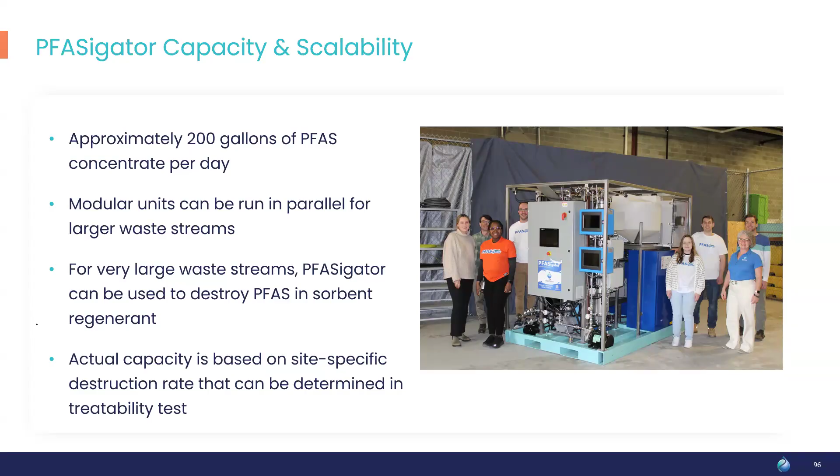Key challenges and breakthroughs for us. Just over the lifetime of our company and technology development, we discovered that because we're operating at atmospheric conditions, we can actually measure the production of fluoride ion as the PFAS are broken up. So we have that measurement happening in the technology, and we can see that in real time. We can confirm the destruction is happening.

Low UV transmissivity — there was a question at first whether that was going to be an issue for waste streams like landfill leachate that can sometimes look like espresso. This turns out to not be an issue for the PFASigator.

I'm technologically challenged today.

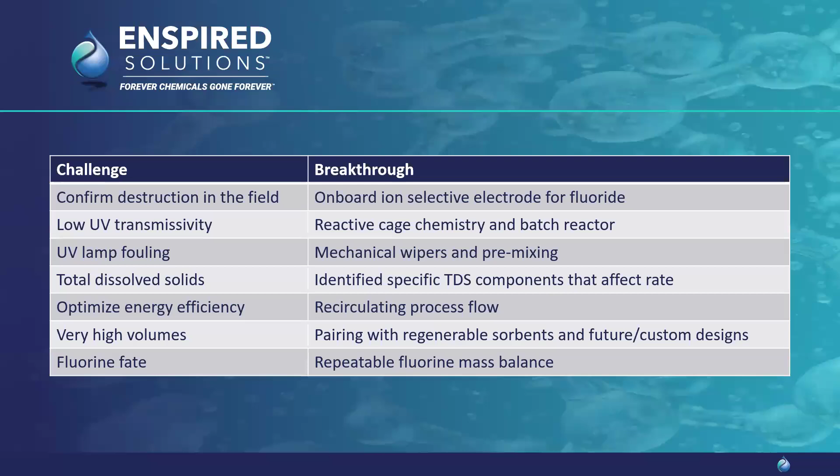This is because of two things: the reactive cage that is formed in the chemical process, and also the batch reactor that the PFASigator is. Each of those packets has a chance to run closely past the UV lamp for destruction to occur. So we're seeing good reaction rates, even down to less than 1% transmissivity, or even down to 0.1% transmissivity.

UV lamp fouling — in early runs of the actual unit in the field, we were seeing that the lamp could be fouled with a film of reagents. We have since changed the lamp over to mechanical wipers, and also we're pre-mixing the reagents and test solutions, and we've been able to avoid the lamp fouling.

Maybe hopefully you'll get a copy of the slides and you can see the rest of the items there.

Thanks, Tom. Yeah, sorry about the advancing — I don't know what's gone on with the program here. Unplug the clicker, is it the clicker doing it? I don't know. We'll unplug the correct clicker, so you need to use the forward and back. Last up.

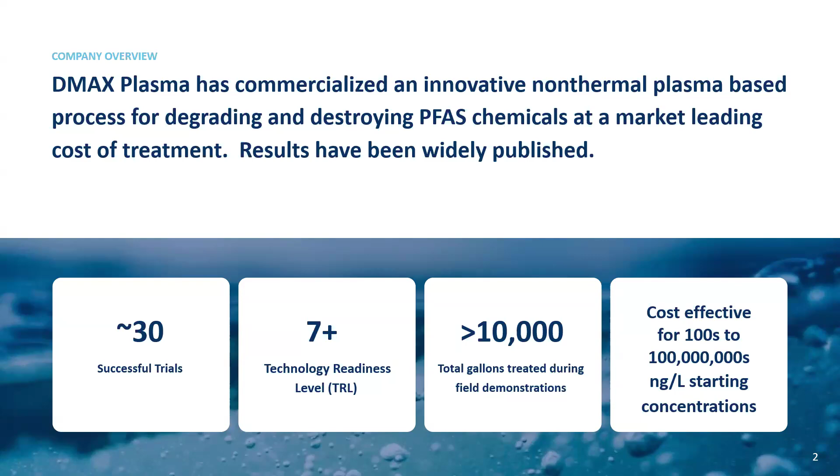Someone already told you what plasma is all about, so I can skip that slide.

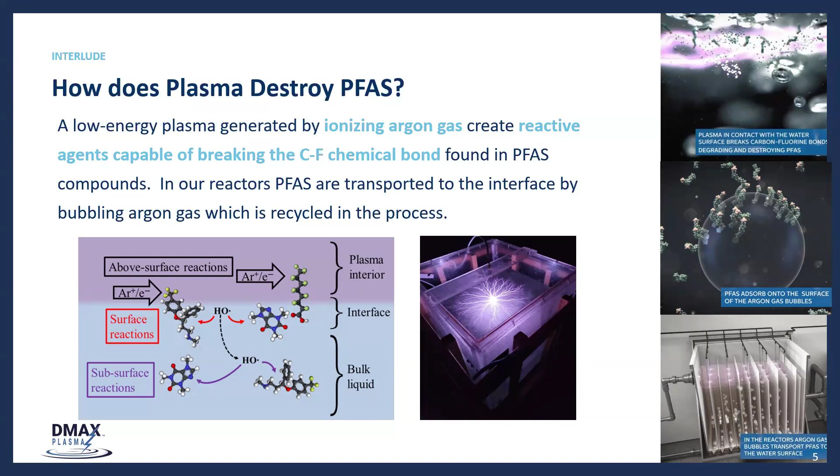Our technology is based on bubbling gases, shown on the right-hand side. We bubble gas through the water column and concentrate the PFAS at the interface where we generate plasma, as shown in this slide. So we're separating the PFAS from the water streams, so co-contaminants and things like that don't interfere with our process.

As I mentioned, we're quite flexible. We can work from raw water, low concentration streams, to very high concentrations. We've worked with groundwater, leachates, industrial wastewater from semiconductor manufacturing, AFFF foams, stormwater. More recently, we've been working with some soil washing solutions.

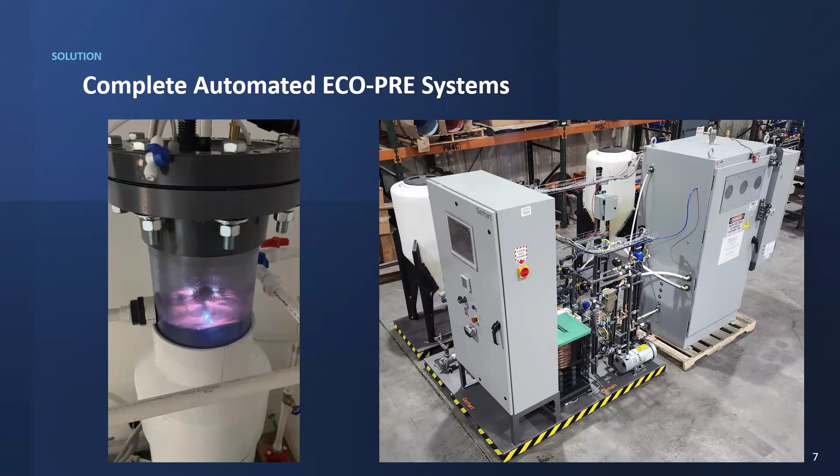Hopefully this video will work. So we charge capacitors, discharge them about 60 times per second right at the surface of the water, and generate the plasma.

Typically, we work with multiple reactors in series, because PFAS is quite sticky. If you try to treat from micrograms per liter down to discharge limits in one reactor, you get desorption problems. So we treat in series, high concentration, middle concentration, polishing reactor. I show 3 here, but our trailers actually have 5 reactors in series.

For higher concentrations, we short circuit this flow-through design and do sequential batch treatment. So we treat a high concentration in this reactor for whatever time is required, typically maybe hours, switch it to the next reactor, and keep moving it down the chain until we reach the limits we want.

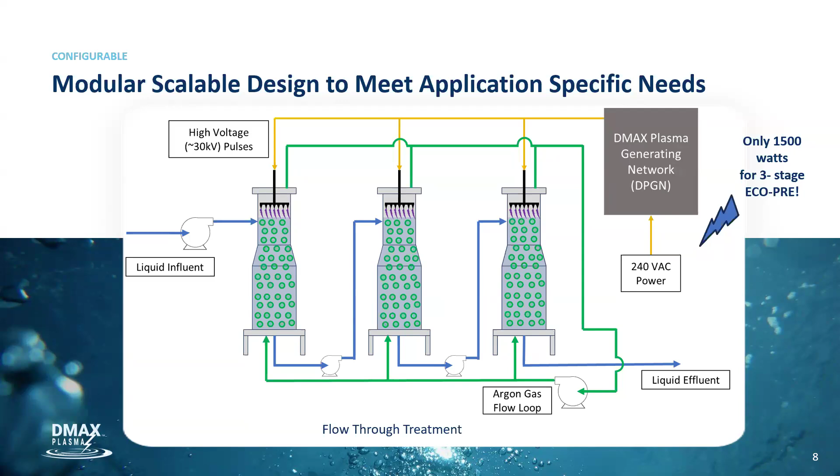We've done quite a bit of discussion on cost and throughput. Unfortunately the format doesn't work too well here, but it doesn't matter. Our trailers are typically around 20 gallons per minute. If you want higher flow rates, you can put multiple trailers or multiple treatments in series. And as concentration increases, the flow rate goes down because you have to treat it longer, right?

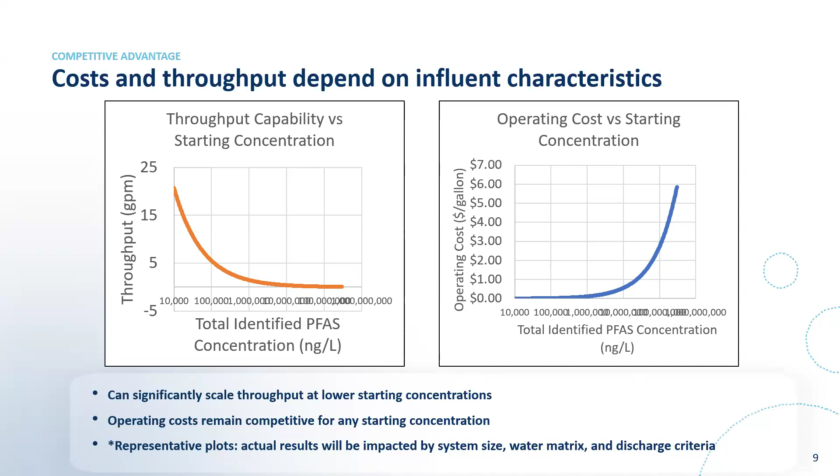Makes sense. Cost for direct groundwater treatment, we're in pennies per gallon. As treatment time increases, costs go up, obviously, so from pennies per gallon to dollars per gallon, depending on the matrix.

So what are we doing now? We're working to increase our inventory base, more treatment trailers, increase capacity, make the reactors more efficient. Ongoing product development, as all of us in the room are working on, trying to improve our technology and increase opportunities.

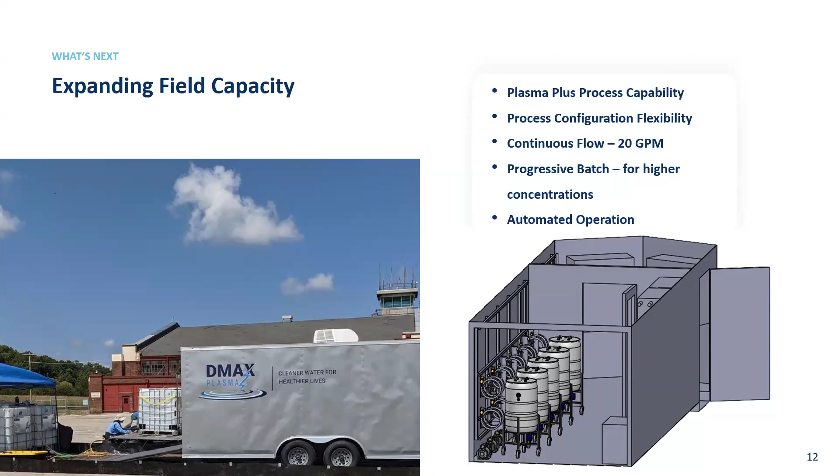So let me quickly wrap up so we have some time for questions. Trailers - one of our trailers in the field, 5 reactors in a typical trailer.

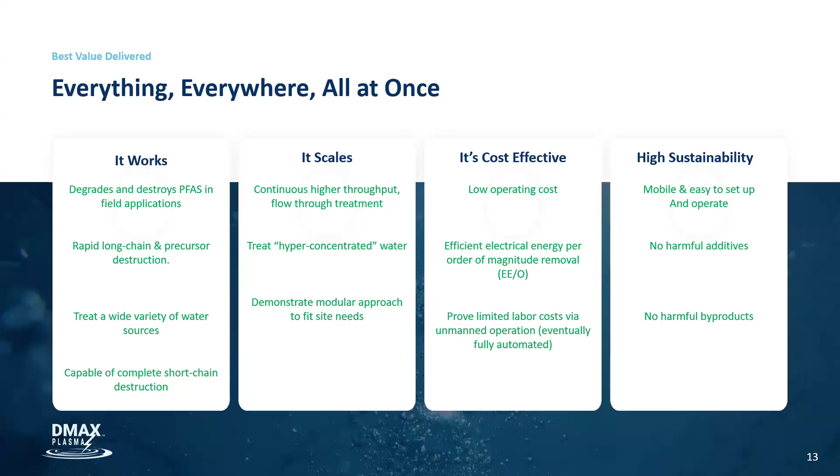So we've shown it works for a wide range of matrices. We can scale to the needs of the client, cost effective, and as someone pointed out, plasma technology is quite sustainable - little limited additives required and energy efficient. So I quickly ran through that to give hopefully 15 minutes or so for questions. Thank you.

You guys can all come up, stand along the edge here, and I guess if we have questions, we can use some time now to answer them. If you ask a question, maybe I'll hand off the microphone to you, so the remote viewers can hear. Maybe everybody just wants to go to lunch. But okay, let's see.

Great presentations and very impressive technologies. So the key question here is about key destructive technologies or complete destruction. My question is on degradation byproducts. Many of these technologies are producing fragments of PFAS, and the idea is you have something that is completely non-toxic, but is that true? Have you looked at things like TFA, for example?

Thank you, I'll start here and pass it down. Yeah, great question, we have looked at TFA. Unfortunately it's extremely difficult to analyze just because it's everywhere, so I can't say with confidence, conclusive evidence, because every time we run the analysis you can see significant changes in the results. But typically we'll use PFBA as our indicator compound to show that those should increase in concentration, then ultimately decay away, and that's when we feel pretty confident. Typically we work in concentrations that are extremely low, so we can't use, for example, the fluoride ion selective electrode the way Sarah does - we can't use that, so we typically try to measure for PFBA.